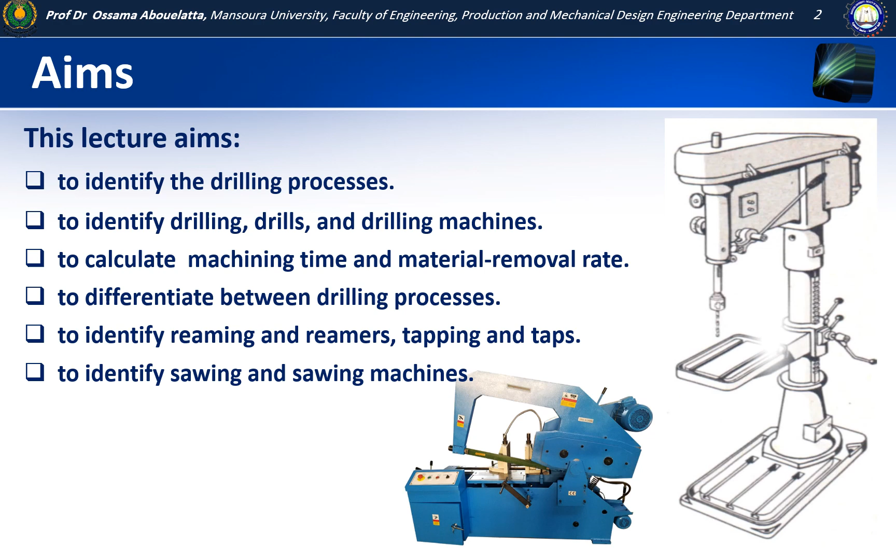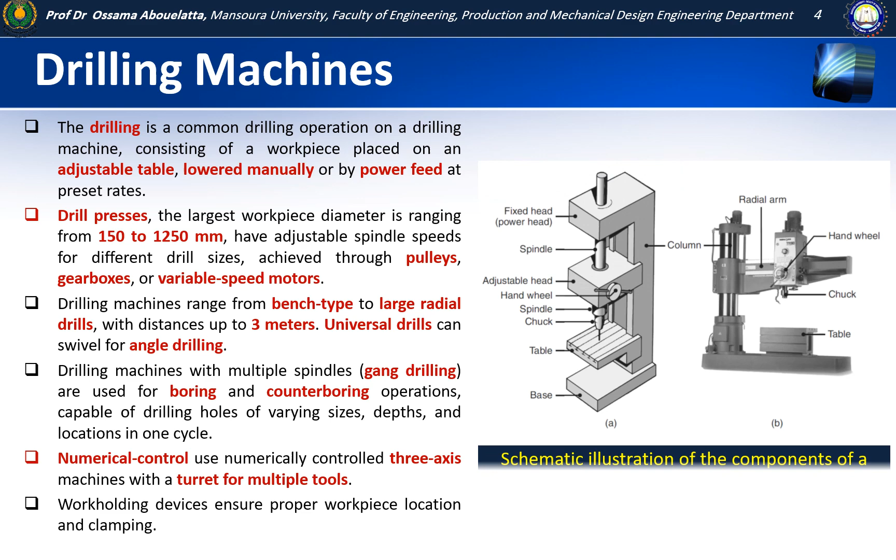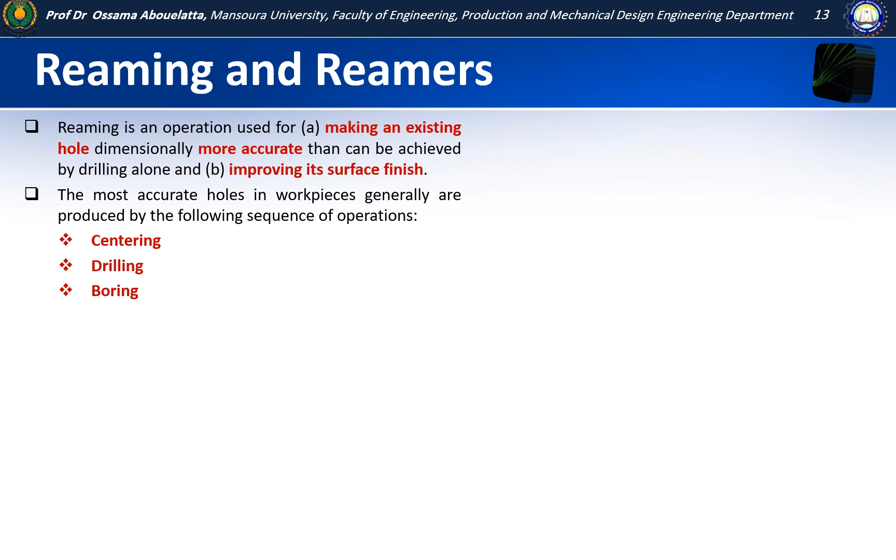In this video, you'll learn about drilling machines and how they work, their parts, operations, tools, and types of drilling machines.

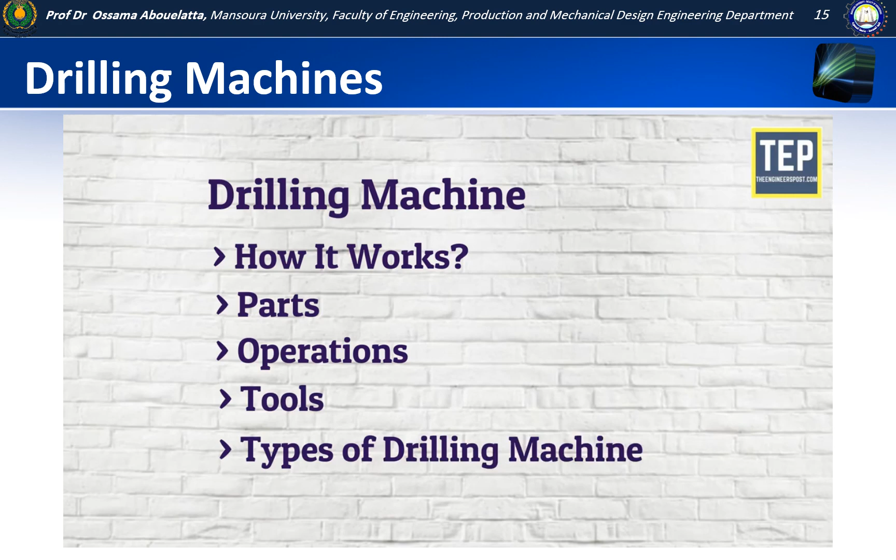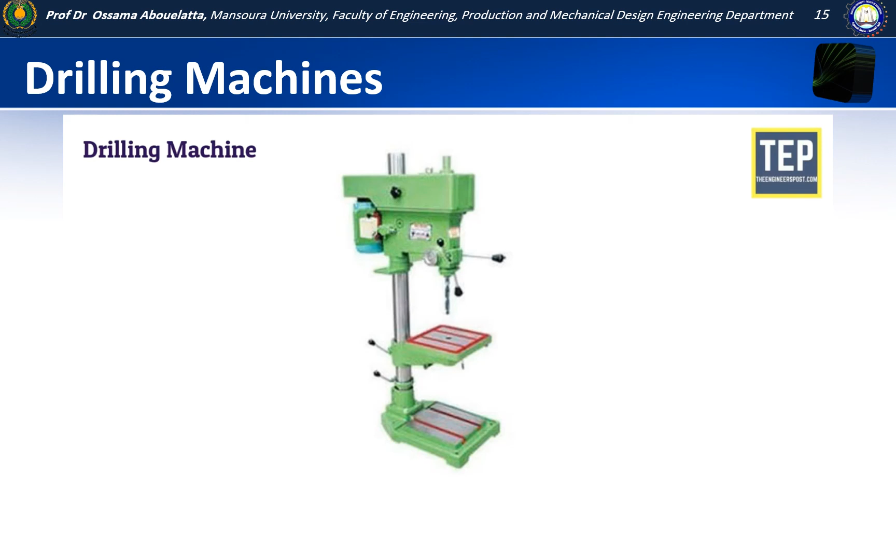The drilling machine is defined as a machine used to make a circular hole. A tool called a drill bit is used to drill holes of different sizes and other related operations. The drilling machine is the second most important machine in a workshop after the lathe machine.

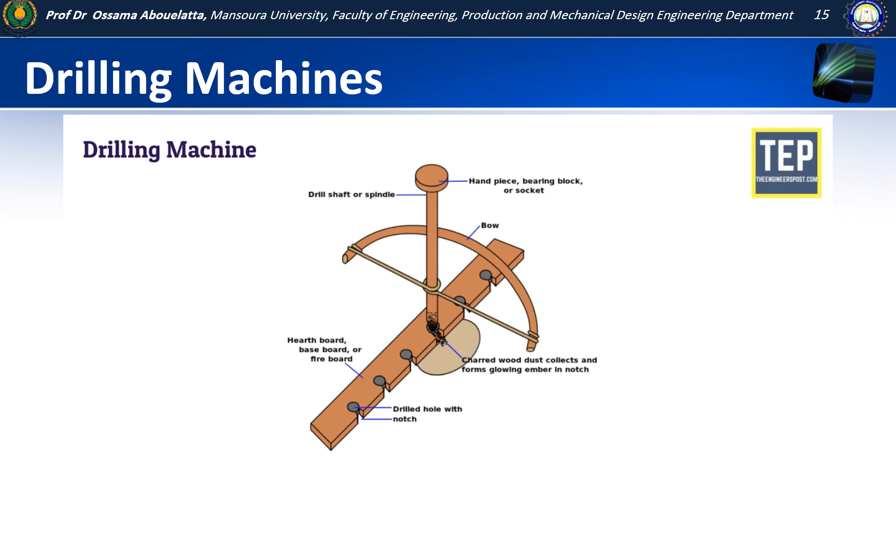Holes were drilled by the Egyptians in 1200 BC, about 3000 years ago, by bow drills. The bow drill is the mother of present-day metal cutting drilling machines.

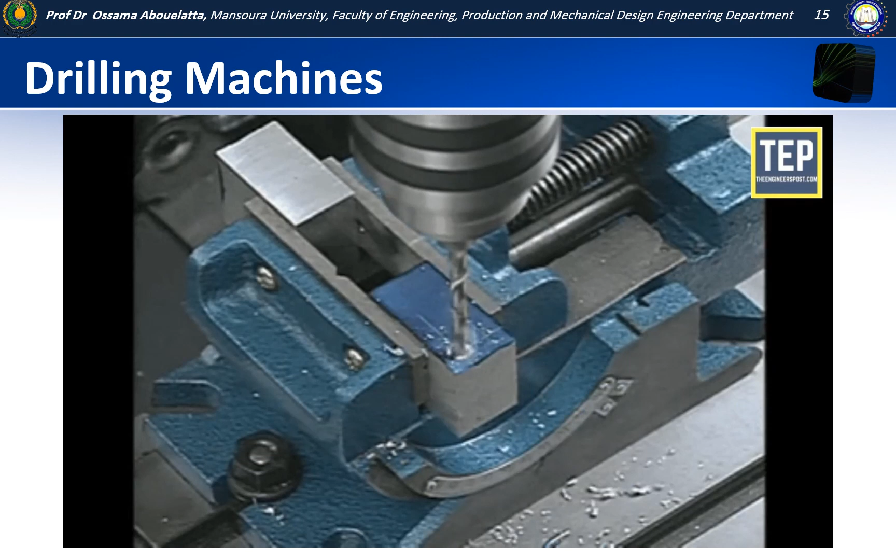In a drilling machine, holes may be drilled quickly and at low cost. The hole is generated by the rotating edge of a cutting tool known as the drill. It applies a large force on the work mounted on the table.

As the machine uses vertical pressure to originate a hole, it is loosely called a drill press. Parts of drilling machine: the main parts are base, column, table, table clamp, electric motor, hand wheel, chuck, and drill.

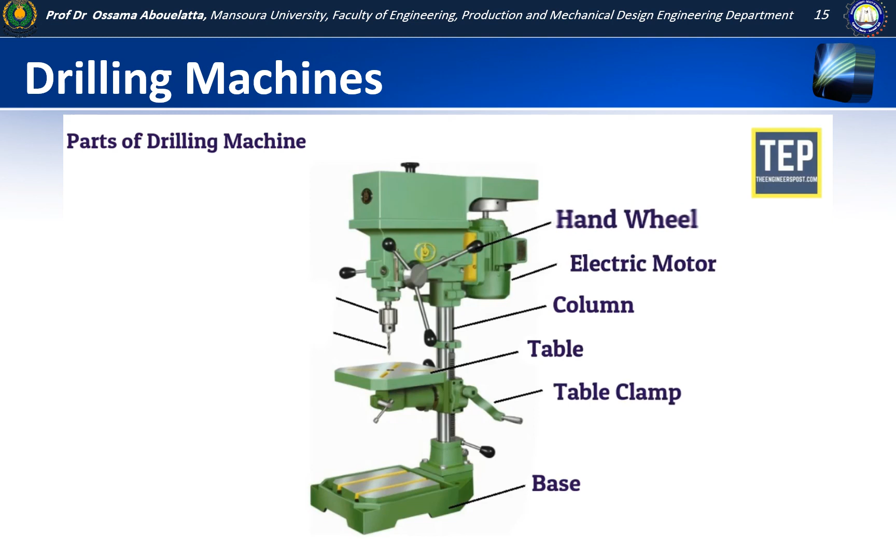Base is the part of the machine on which the vertical column is mounted. The base is made of casting and supports the column and worktable with other attachments. The top of the base is of round or column section type where large workpieces and work holding devices may be set up and bolted on it. The base of the machine may be mounted on a bench or on the floor.

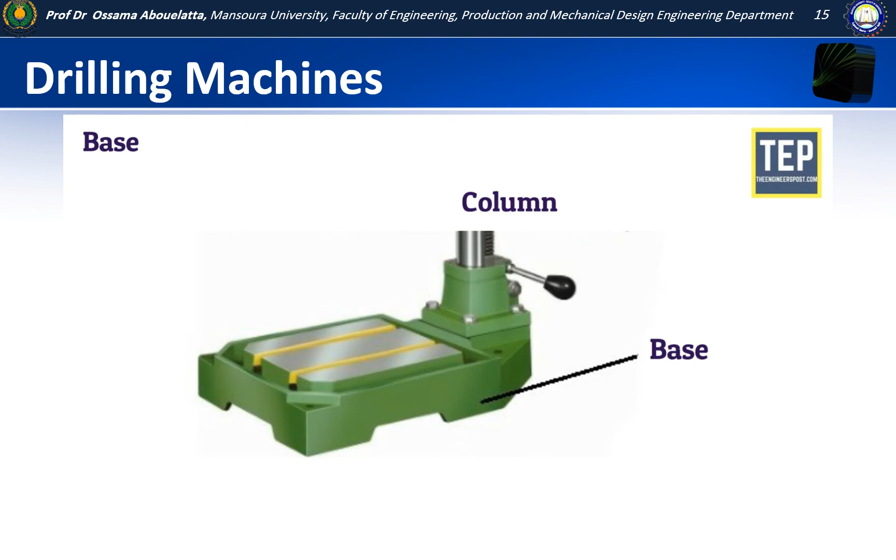The column is the vertical member of the machine which supports the table and the head containing all the driving mechanism. It is a cylindrical casting mounted vertically at one end of the base and supports the radial arm, which slides up and down.

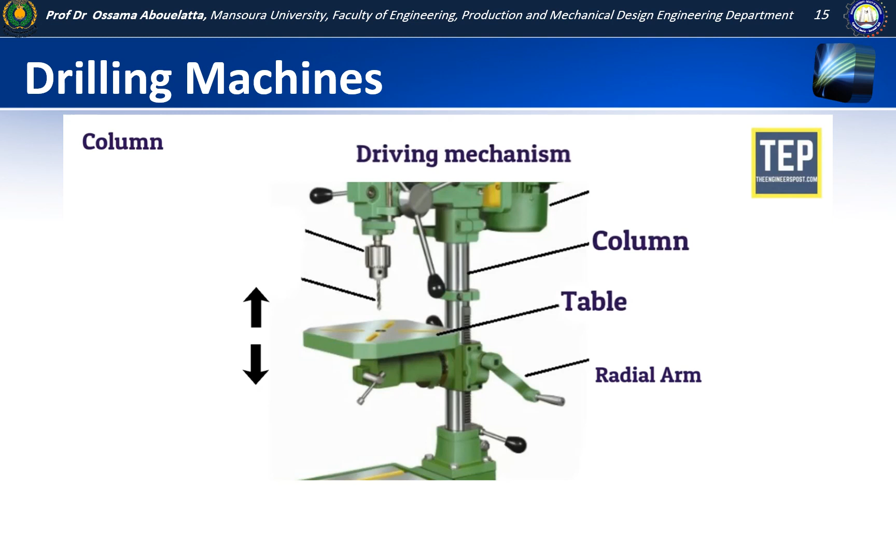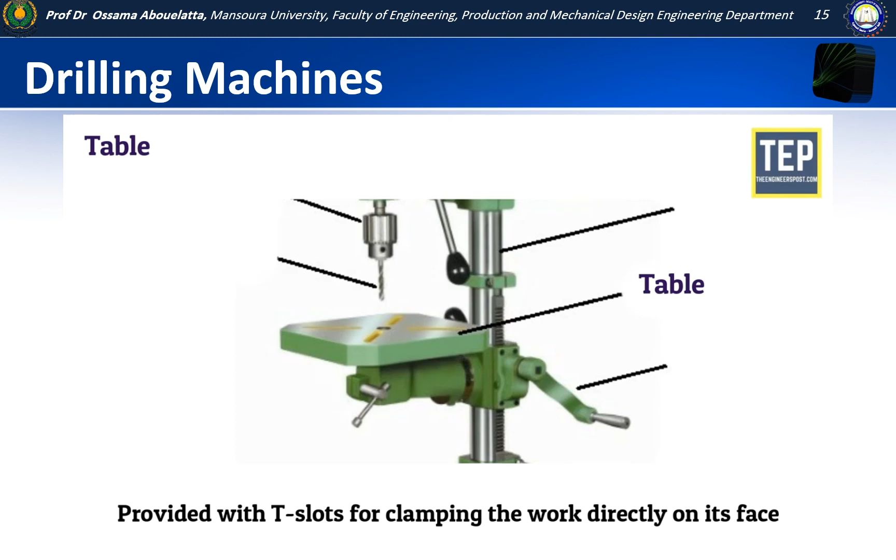The table is mounted on the column and is provided with T-slots for clamping the work directly on its face. The table is round or rectangular in shape.

The radial arm is mounted on the column and extends horizontally over the base. It has guideways on which the drill head slides. The radial arm moves around the column.

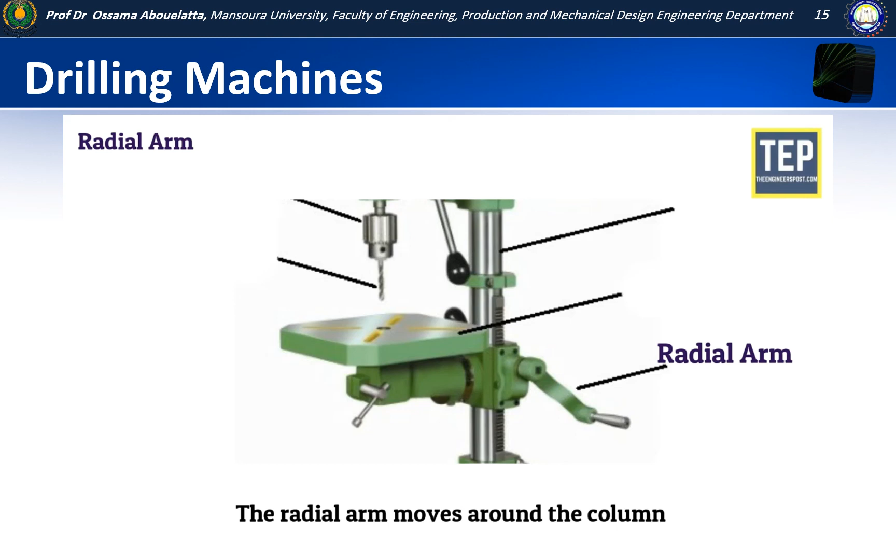The drill head is mounted on the radial arm and drives the drill spindle. In some drill machines, the drill head may be adjusted up or down for accommodating different heights of the work, in addition to the table adjustment. In lighter machines, the driving motor is mounted at the rear end of the head for counterbalancing the weight of the drill spindle.

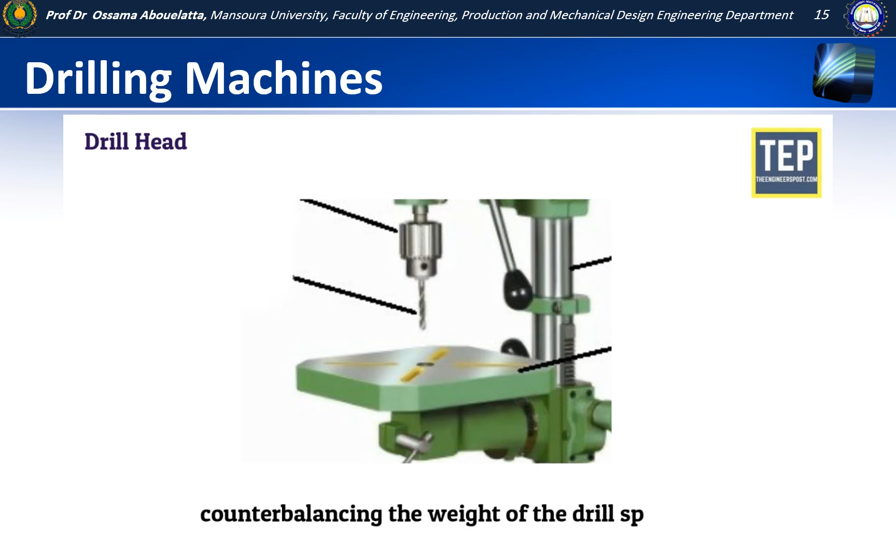Types of drilling machine. There are 8 different types of drilling machine used, which are: portable drilling machine, sensitive drilling machine, upright drilling machine, radial drilling machine, gang drilling machine, multiple spindle machine, automatic drilling machine, and deep hole drilling machine.

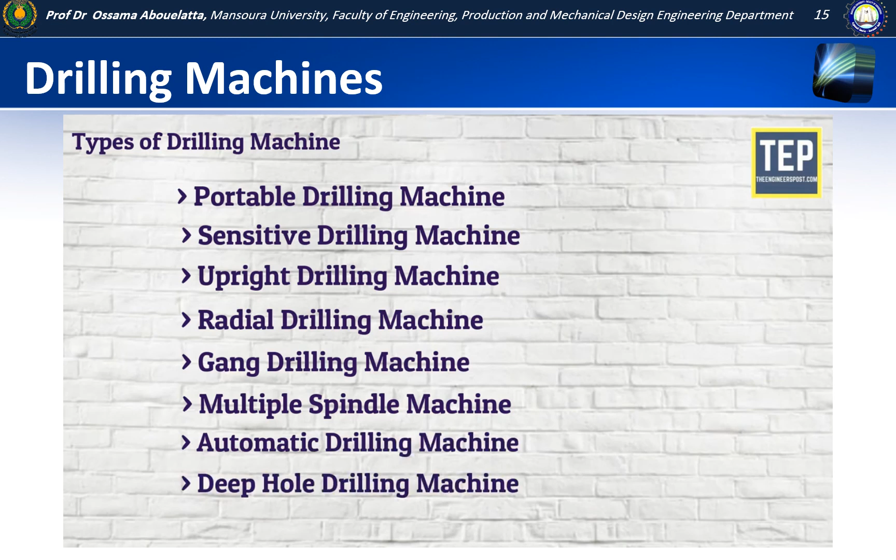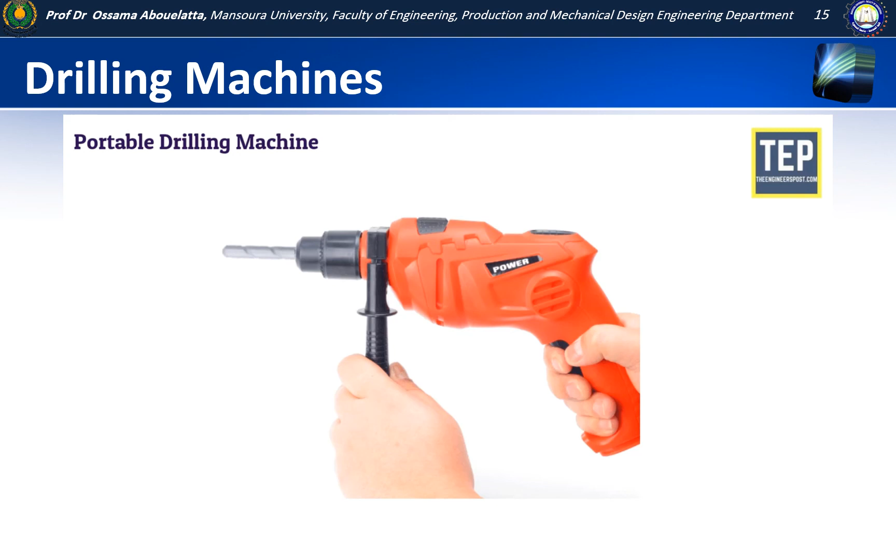Portable drilling machine. These types of drilling machines are commonly used in all workshops to drill small-sized holes. It is operated by holding in a hand. The workpiece where the hole is to be drilled is held in a vise.

Sensitive drilling machine. This type of drilling machine is used to drill small holes at high speeds in lighter jobs. The machine may be mounted on the floor, and the drilling work is started with the drill fed into the workpiece by hand control.

Hand feed permits the operator to sense the progress of the drill into the workpiece, so that if there is any drill worn out or jams, it may be released immediately to prevent the drill bit from breaking. Since the operator senses the cutting action at any instant, it is called the sensitive drilling machine. These machines are capable of drilling small holes of diameter up to 0.35 mm to 15 mm.

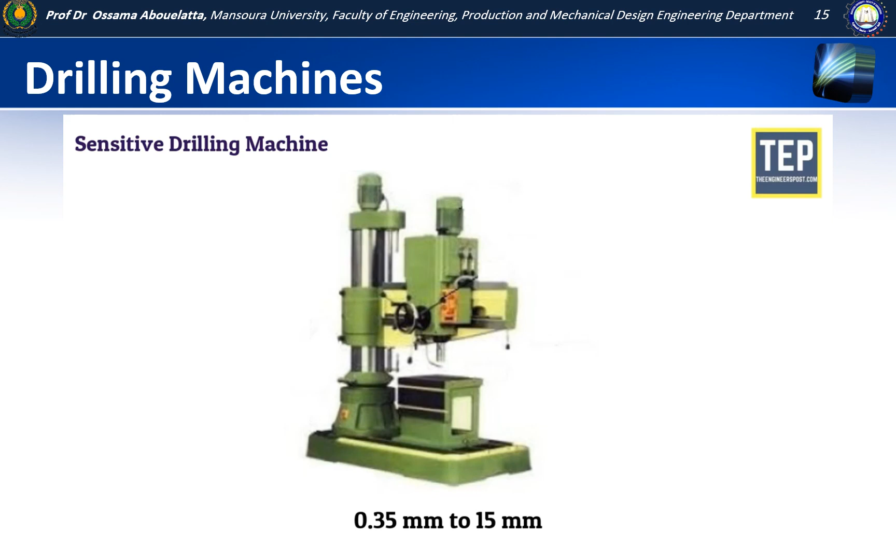Upright drilling machine. Upright is larger in size and stronger than the sensitive drilling machine. It is used for drilling medium and large-sized holes. Based on the type of column used, it is classified as round column and box column upright drilling machines.

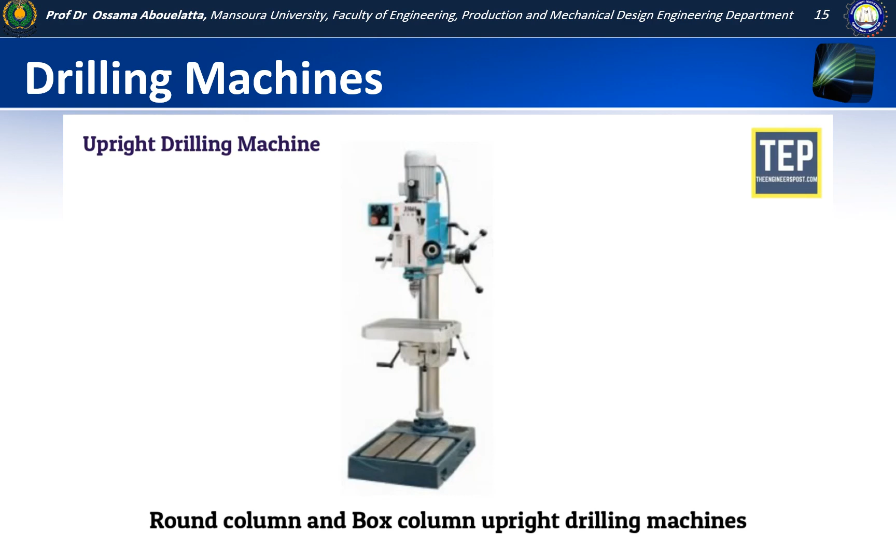Radial drilling machine. The radial drilling machine is shown in the figure. It consists of the base, column, radial arm, drill head, spindle speed, and feed mechanism.

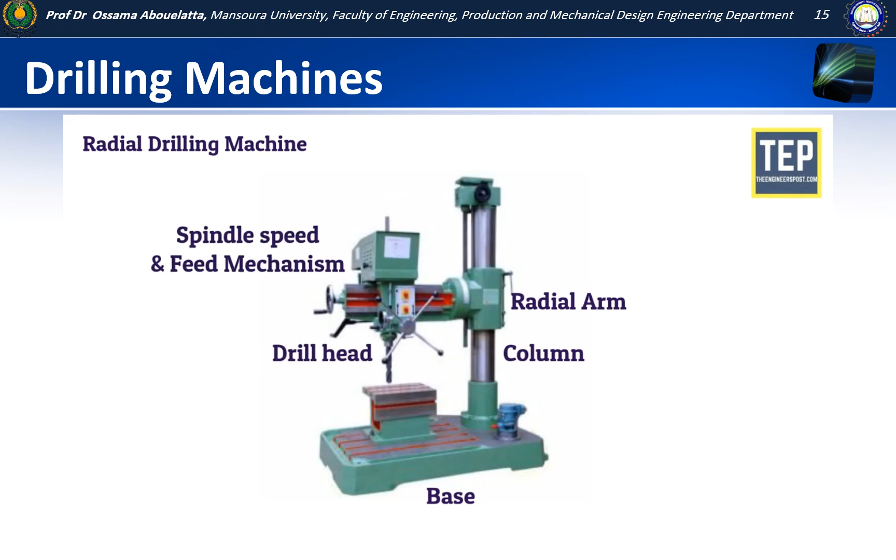Gang drilling machine. This machine consists of a number of drill heads placed side by side to drill more than one hole of same or different sizes at a time, on the same or different jobs. The space between drill spindles is varied to suit the gap between the holes. This type of machine tool is used to drill a large number of holes in the same job at a faster rate.

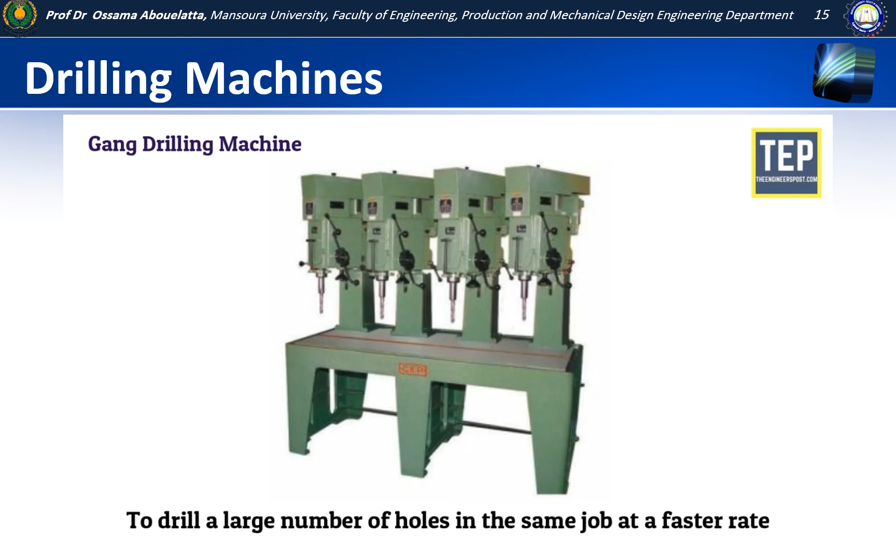Multi-spindle drilling machine. It is used to drill a number of holes in the same workpiece simultaneously, and to reproduce the same work in a number of similar jobs. All the spindles are driven by a single motor and fed continuously. During the feeding, the table with the workpiece is raised or lowered, and the drill head position is not varied.

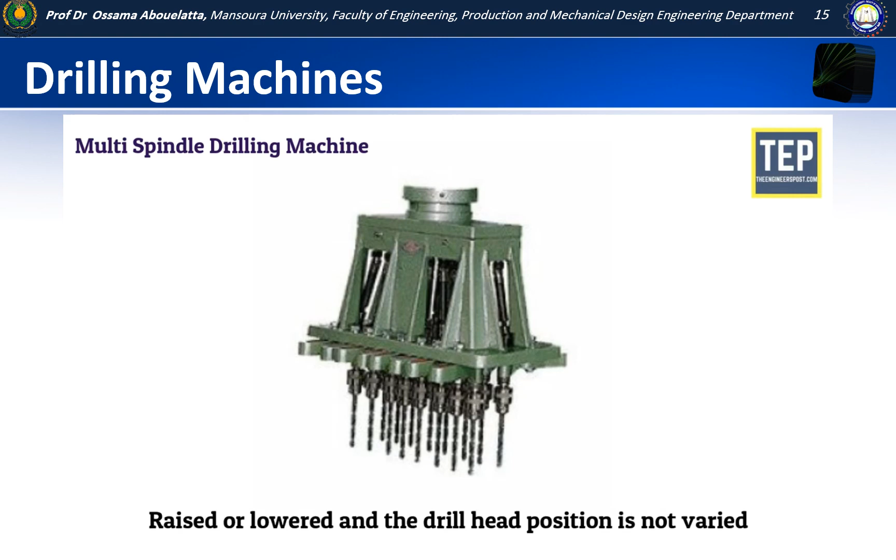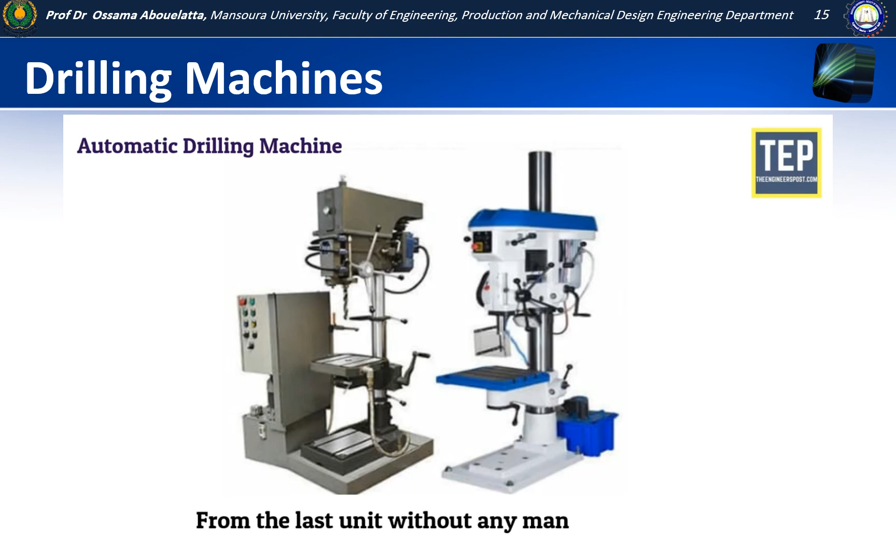Automatic drilling machine. This type of drilling machine can perform a series of machining operations at successive units and transfer the work from one unit to the other automatically. Once the work is loaded at the first machine, it will move from one machine to the other where different operations can be performed, and the finished work comes out from the last unit without any manual handling.

Deep hole drilling machine. This may be either a horizontal or vertical type of machine. In this drilling machine, the part to be drilled is rotated and the drill bit that makes the hole is kept stationary. Deep hole drilling is done in components like rifle barrels, crankshafts, and long shafts, etc.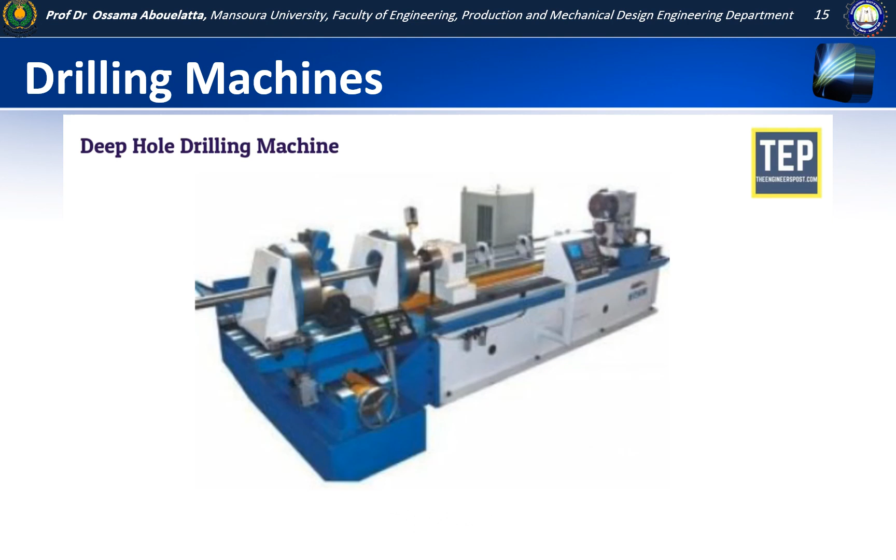Drilling machine tools. A drill is a fluted cutting tool used to originate or enlarge a hole in a solid material. Drills are manufactured in a wide variety of types and sizes.

The different types of tools used in drilling machine are flat or spade drill tool, straight fluted drill tool, two-lip twist drill tool. In two-lip drill there are 4 types available: parallel shank short series or jobbers twist drill, parallel shank stub series twist drill, parallel shank long series twist drill, parallel shank twist drill, taper shank core drill, 3 or 4 fluted, oil tube drill, and center drill.

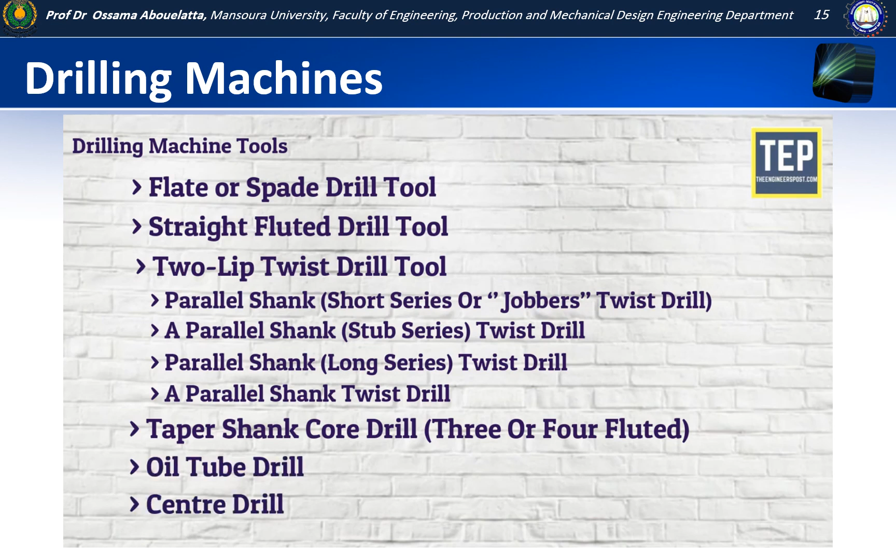Flat or spade drill tool. A flat drill is sometimes used when the same size twist drill is not available. It is usually made from a piece of round tool steel which is forged to shape and ground to size. The cutting angle varies from 90 to 120 degrees, and the relief or clearance at the cutting edge is 3 to 8 degrees. The disadvantage of this type of drill is that each time the drill is ground, the diameter is reduced.

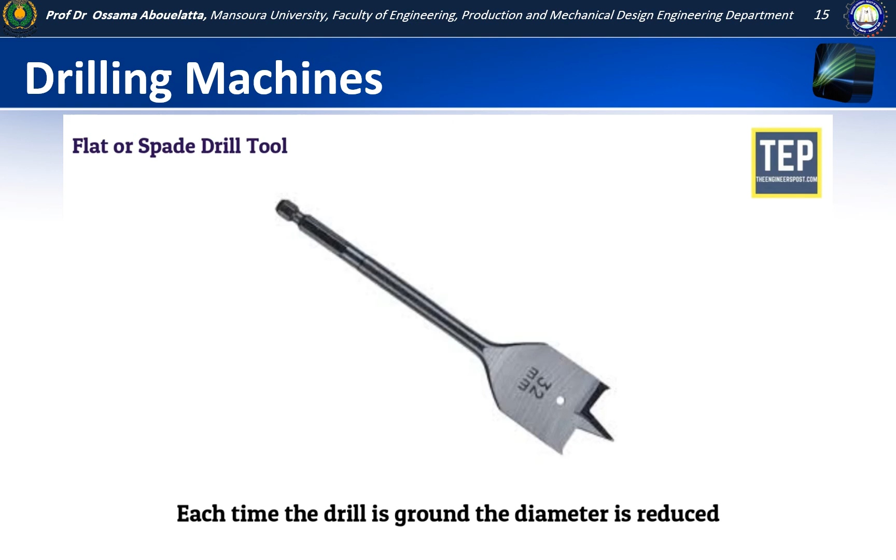Straight fluted drill. A straight fluted drill has grooves or flutes running parallel to the drill axis. It may be considered as a cutting tool having zero rake. This type of drill is inconvenient in standard practice as the chips do not come out from the hole automatically. It is mainly used in drilling brass, copper, or other softer materials.

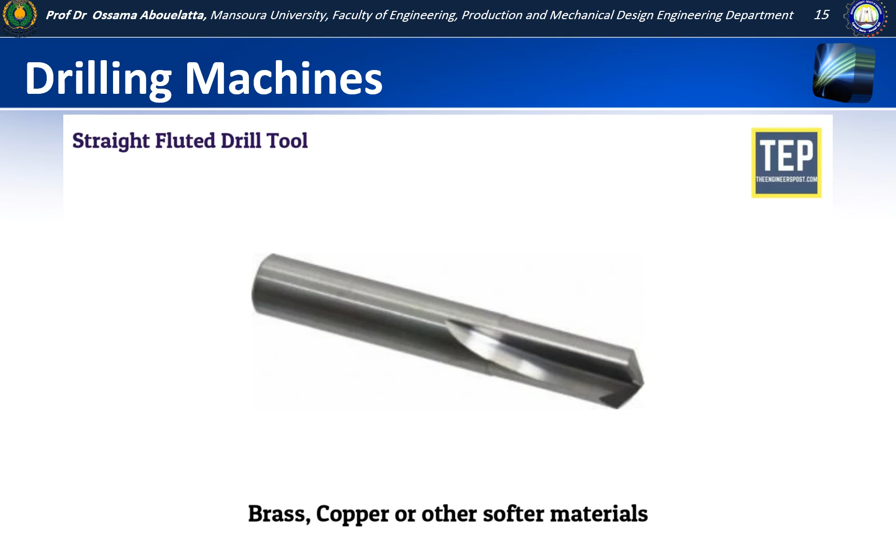Twist drill. It is the most commonly used type of drill and was originally manufactured by twisting a flat piece of tool steel. Present-day twist drills are made by machining two spiral flutes or grooves that run lengthwise around the body of the drill.

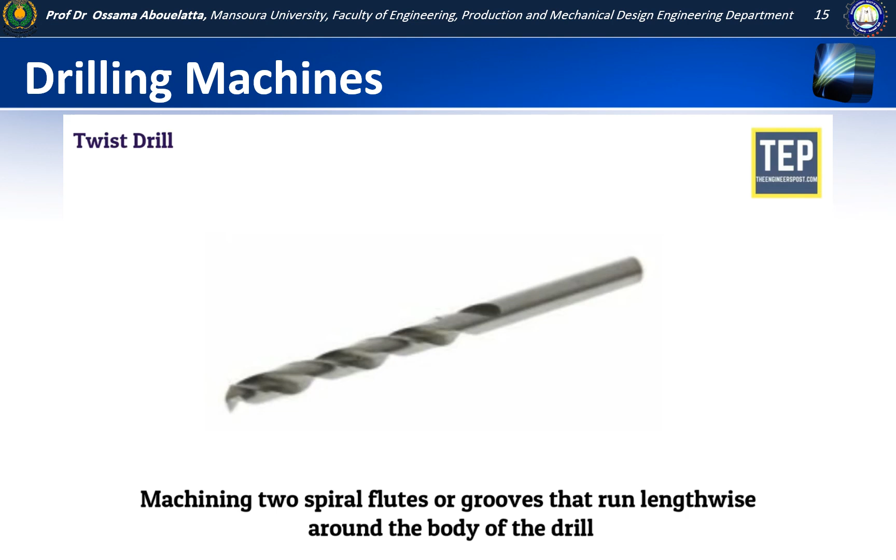Taper shank core drill. These drills are intended for enlarging cored, punched, or drilled holes. They cannot originate a hole in a solid material because the cutting edges do not extend to the center of the drill. The metal is removed by a chamfered edge at the end of each flute. Core drills produce better finished holes than those cut by ordinary two-fluted drills.

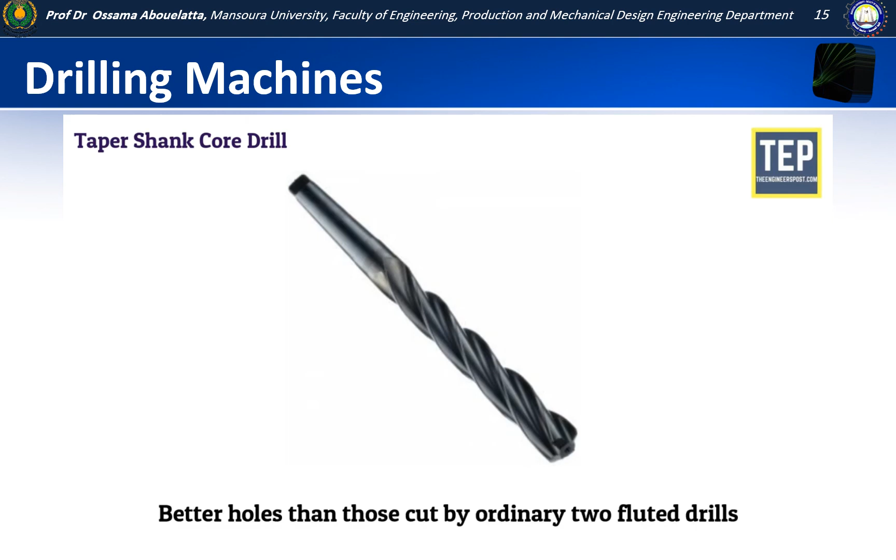Center drill. Center drills have a straight shank with two-fluted twist drills used when center holes are drilled on the ends of a shaft. They are made in finer sizes.

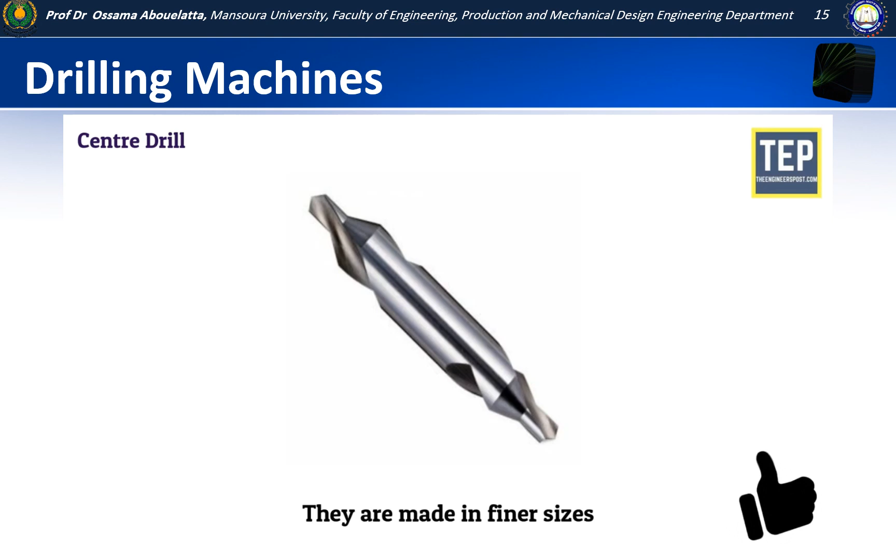Drilling machine operations. The different operations performed on the drilling machine are drilling, reaming, boring, counterboring, countersinking, spot facing, tapping, lapping, grinding, and trepanning operation.

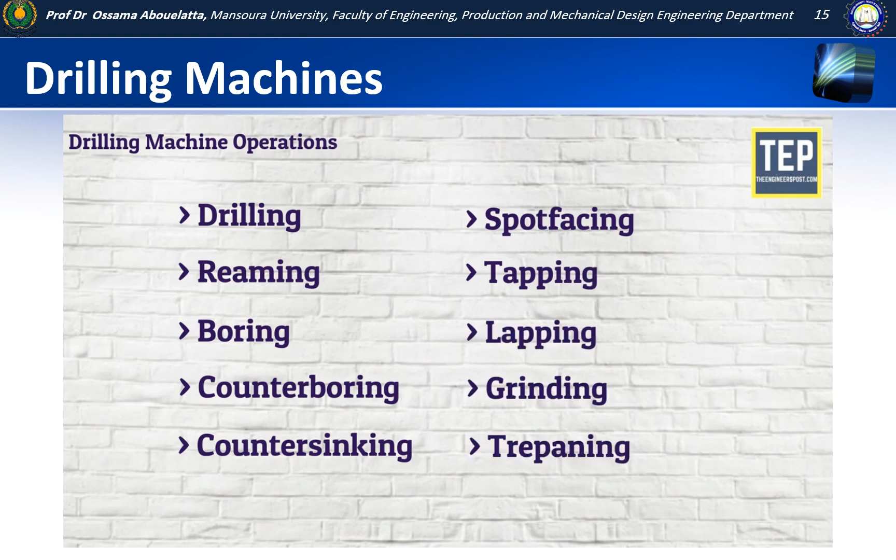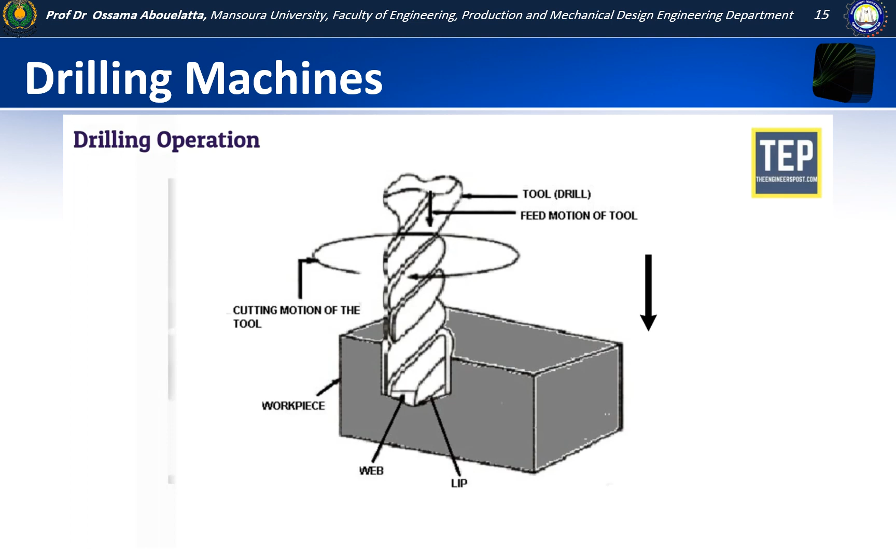Drilling operation. Drilling is the operation of producing a cylindrical hole by removing metal by the rotating edge of a cutting tool called the drill. It is one of the simplest methods of producing a hole. The center of the hole is located on the workpiece by drawing two lines, and then the drill point is pressed at this center point to produce the required hole. The internal surface of the hole generated by drilling becomes rough, and the hole is always slightly oversized due to the vibration of the spindle and the drill.

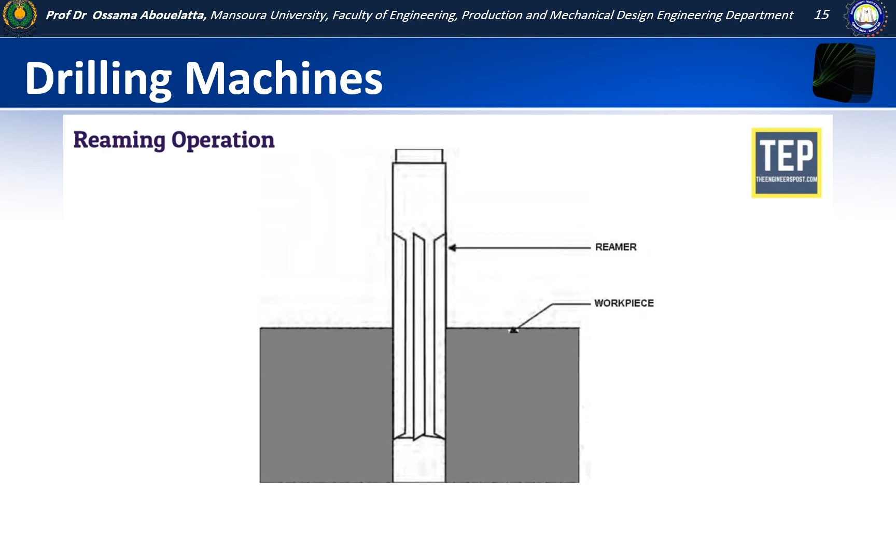Reaming operation. Reaming is an accurate way of sizing and finishing a hole which has been previously drilled. In order to finish a hole and bring it to the accurate size, the hole is drilled slightly under size. The speed of the spindle is made half that of drilling, and automatic feed may be employed. The tool used for reaming is known as a reamer, which has multiple cutting edges.

Boring operation. In boring operation, the cutter is held in a boring bar which has a tapered shank to fit into the spindle socket. For perfect finishing of a hole, the job is drilled slightly under size.

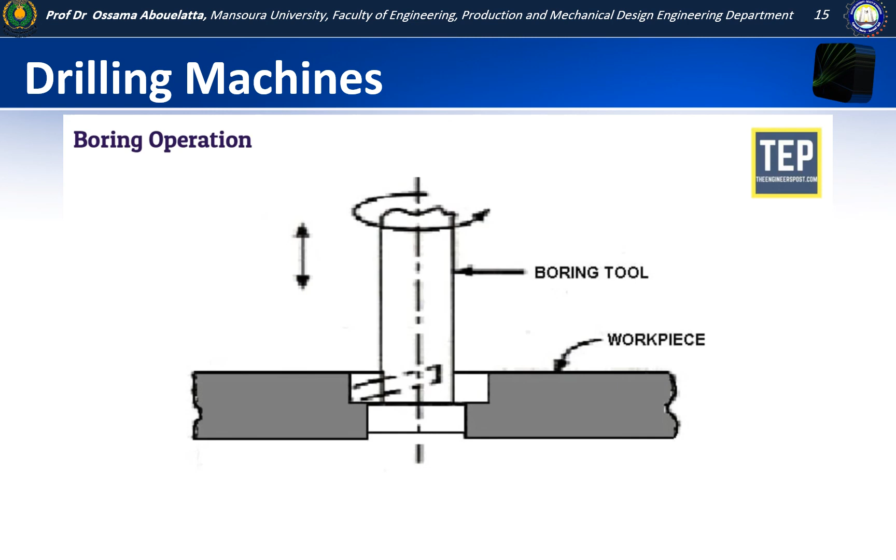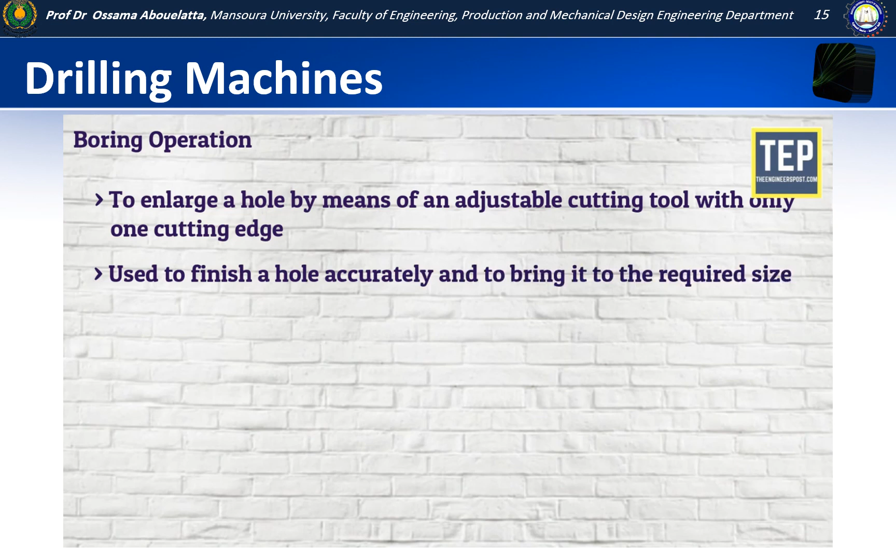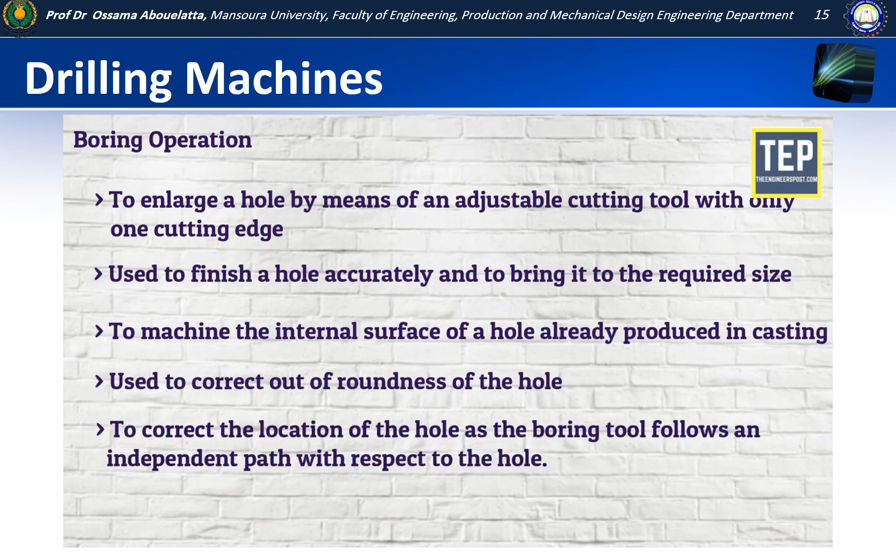Boring is performed to enlarge a hole by means of an adjustable cutting tool with only one cutting edge, used to finish a hole accurately and bring it to the required size, to machine the internal surface of a hole already produced in casting, to correct out of roundness of the hole, and to correct the location of the hole as the boring tool follows an independent path with respect to the hole.

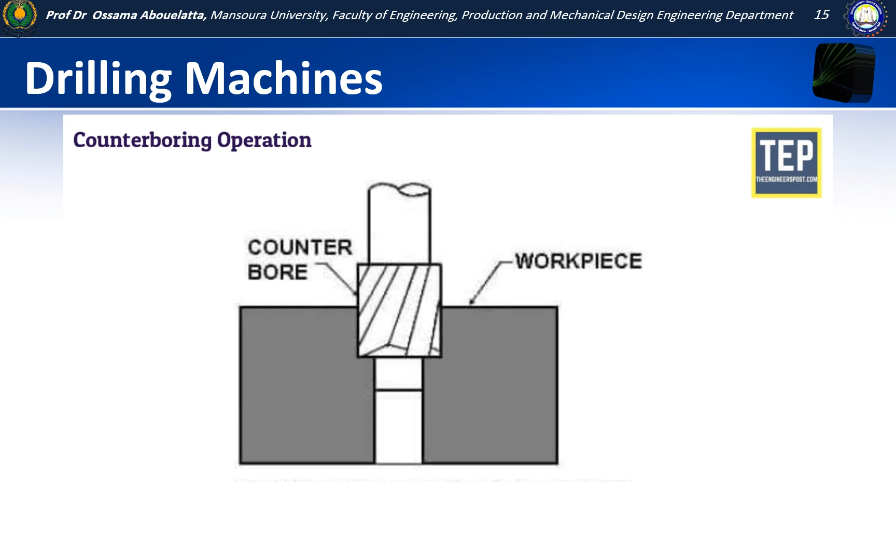Counterboring operation. Counterboring is the operation of enlarging the end of a hole cylindrically. The enlarged hole forms a square shoulder with the original hole. This is necessary in some cases to accommodate the heads of bolts, studs, and pins. The tool used for counterboring is called a counterbore. Counterbores are made with a straight or tapered shank to fit in the drill spindle, and the cutting edges may have straight or spiral teeth.

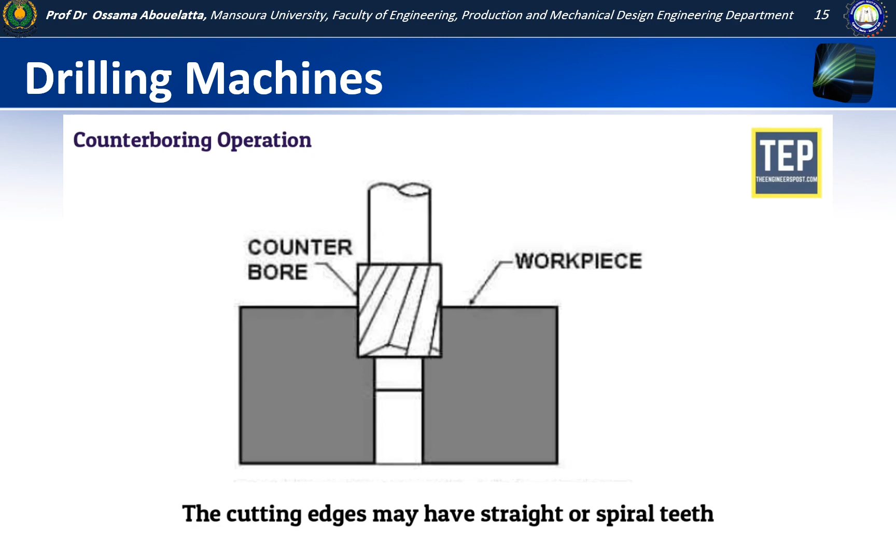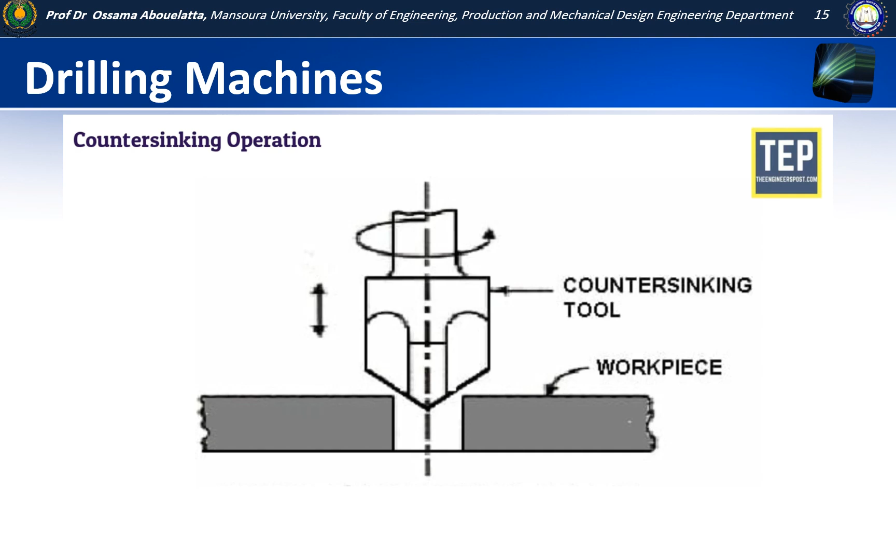Countersinking operation. Countersinking is the operation of making a cone-shaped enlargement of the end of a hole to provide a recess for a flat head screw or countersunk rivet fitted into the hole. The tool used for countersinking is called a countersink.

Spot facing operation. Spot facing is the operation of smoothing and squaring the surface around a hole for the seat of a nut or the head of a screw. A counterbore or a special spot facing tool may be employed for this purpose.

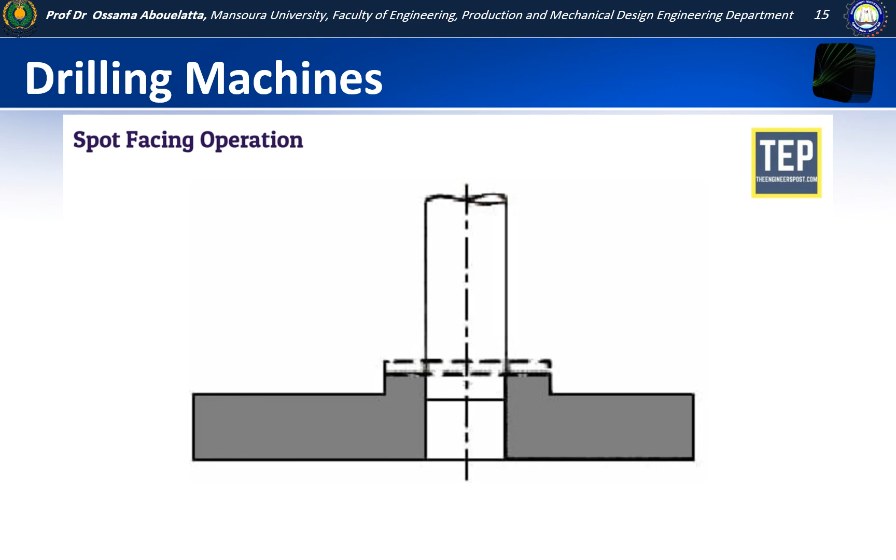Tapping operation. It is the operation of cutting internal threads by means of a cutting tool called a tap. Tapping in a drilling machine may be performed by hand or by machine. A tap may be considered as a bolt with accurate threads cut on it, and the threads act as cutting edges which are hardened and ground.

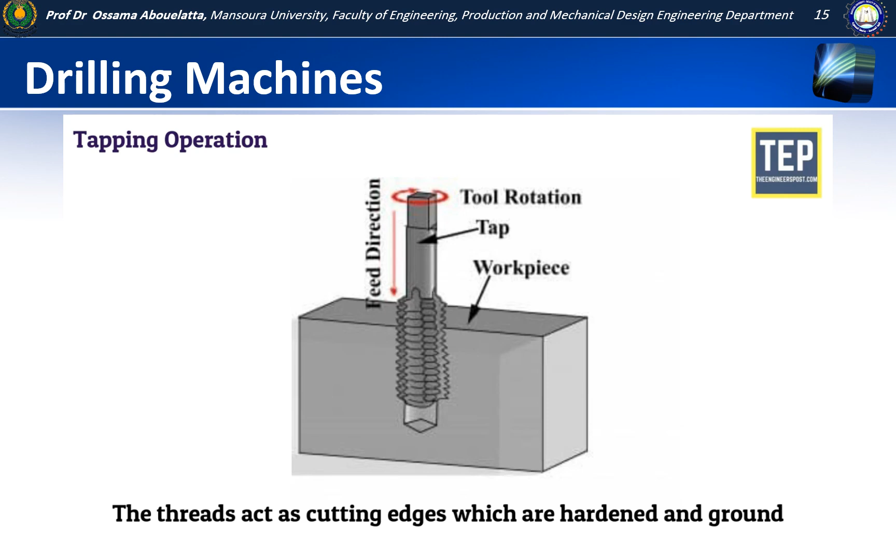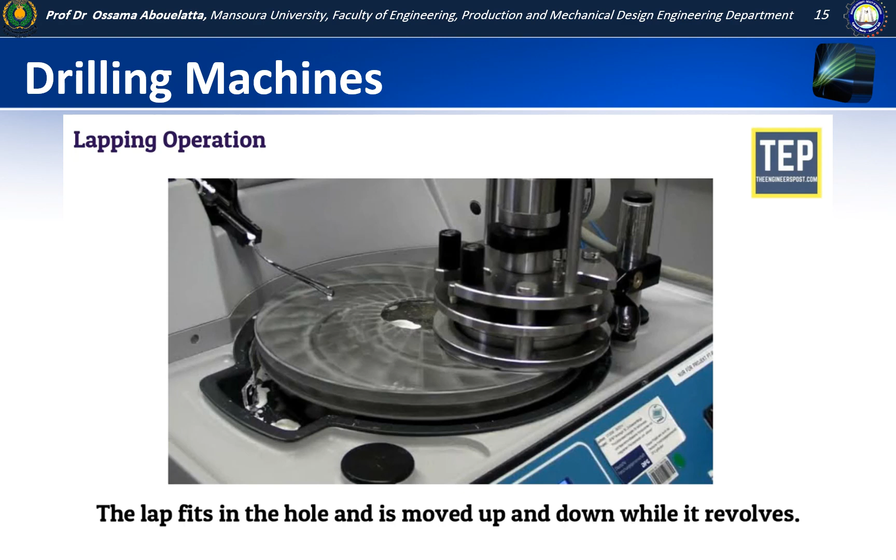Lapping operation. Lapping is the operation of sizing and finishing a small diameter hole that is already hardened by removing a very small amount of material using a lap. There are many kinds of lapping tools; copper head laps are commonly used. The lap fits in the hole and is moved up and down while it revolves.

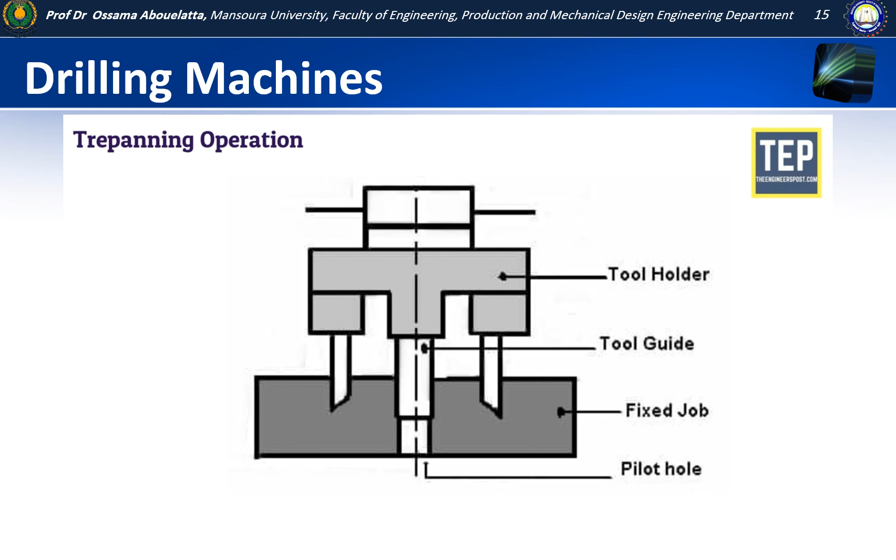Trepanning operation. Trepanning is the operation of producing a hole by removing metal along the circumference of a hollow cutting tool. This operation is performed for producing large holes. Fewer chips are removed and much of the material is saved while the hole is produced.